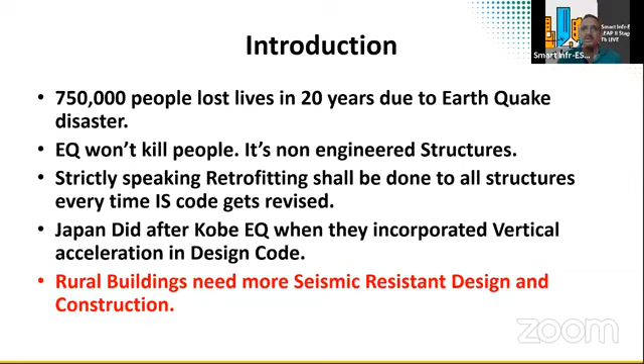So as engineers, we should know where we are standing.

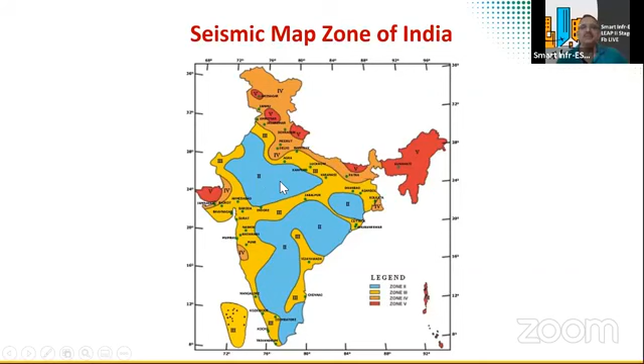So the direct effects of earthquake, we should know what they are: surface faulting, we see the faults happening, vibration of the soil, ground cracking, liquefaction, and ground lurching. Ground lurching means sudden jerk and sinking of the ground, and differential settlements in the buildings or ground. Lateral spreading of the soil happens like landslides, even in normal soil there will be lateral spreading, and landslides happen mainly in northeastern regions and Himalayan regions. We see most of the landslides happening there.

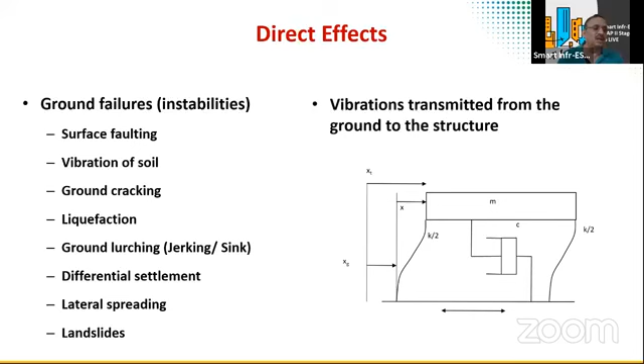So let us understand what the earthquake is all about. It is basically ground shaking and vertical acceleration and vibrations transmitted. Normally we have wind transmitting loads, and we always rely on earth for transmitting our loads. But if earth itself transmits the load to the structure, where do we transfer it? All dead load, live load, wind load, and other loads we transfer to the ground because we assume ground is stable. But if the ground itself shakes during seismic conditions, we have to do a special design. For structural engineers, this is a challenge and we have to learn clearly about it. So what is earthquake about?

For example, we have seen the Latur earthquake and Koyna Dam. Koyna Dam was constructed on a fault, and that caused the earthquake itself because of the excess loading. So for every special large structure, we have to do a geological study, whether it's a power plant, a huge water reservoir, a dam, or a high-rise tall building.

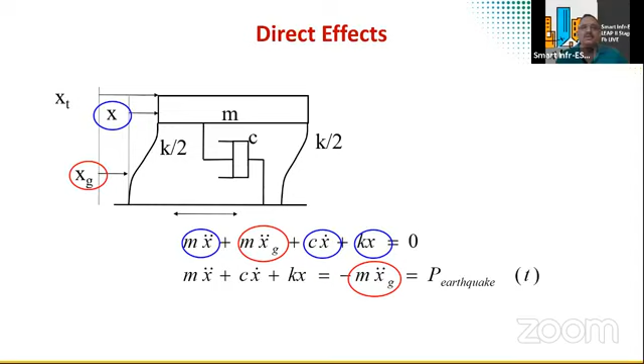So the force due to earthquake, M into acceleration, is the equilibrium equation of mass into acceleration of the structure, because the acceleration of the structure also depends on the stiffness of the structure and the structural system. And damping, as you can see, can also happen due to ductility. So this is the overall equation.

Next, indirect effects of earthquake: tsunami. This was realized in 2004, the first tsunami of the century, because tsunami is a result of earthquake. And seiche is a secondary, slightly lesser effect of earthquake, because it can happen in lakes. Suppose you are constructing buildings around a lake because it gives a beautiful ambience, but seiches can still cause an effect on the building even if not directly from the earthquake.

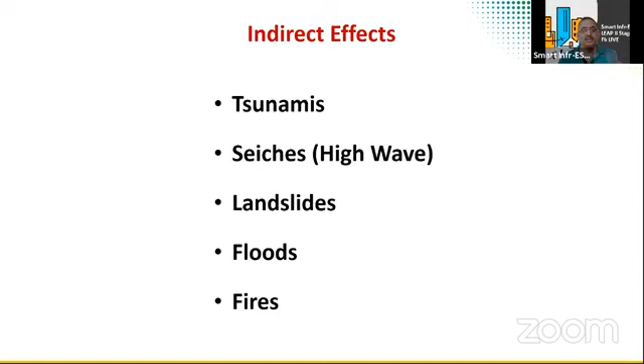So the water level can suddenly rise by 3 meters, 4 meters, either on seasides or river sides due to earthquake. So we have to consider seiche effects. And liquefaction - all of us know what is the effect of liquefaction, which I'll explain in detail as we move forward. Just showing an introduction to all these effects.

So seismic resistant design and construction is to prevent non-structural damage from minor shaking. What are non-structural elements? We have the partition walls, the flooring, the cupboards, the furniture, and the windows, the doors. All these come under non-structural elements.

So the objective of seismic resistant design is to minimize the damage of non-structural elements. We cannot totally eliminate the damage, but we can minimize it and prevent structural damage in occasional moderate shaking. And if it's a huge earthquake that goes beyond, predicting the actual earthquake effect on the structure is very difficult.

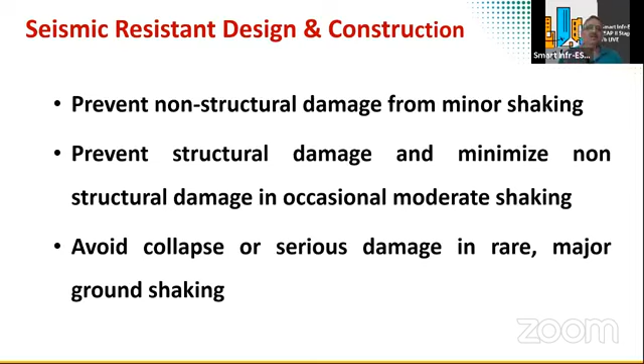Let us understand - we should also educate people that we cannot give 100% zero damage to the structure and non-structural elements. We should always qualify in our design brief that any earthquake resistant design cannot guarantee 100% performance, because the code provisions themselves will not give you that guarantee.

My experience of these earthquakes - my first experience was post-Gujarat earthquake. I had visited Ahmedabad on 30th of January as a volunteer structural engineer, because out of 60 structural engineers in Ahmedabad, 30 were arrested, and 30 engineers had gone underground out of fear of arrest. So there was no structural engineer left in Gujarat. So two of us had to travel from Hyderabad to Ahmedabad.

I had the first-hand experience of people's perceptions post-earthquake. I was also in the committee appointed and selected by the government at that time, along with - I had the fortune of working with Professor A.S. Arya, who is no more, he's in heaven now. He's the earthquake specialist, and I worked with him to draft the guidelines for damage assessment of earthquake affected buildings. We submitted this to the government, which is now code also, for how to compensate the damage due to earthquake in urban scenario, because this was the first urban earthquake experienced in India.

I was involved in a panel formed by Ahmedabad Municipal Corporation to draft guidelines for permissions, which I'll be sharing here, and designed reconstruction of housing in the state in Kutch region and Jamnagar area. I have done the design of these earthquake resistant structures, even ground floor structures. And I was involved in Latur earthquake reconstruction also.

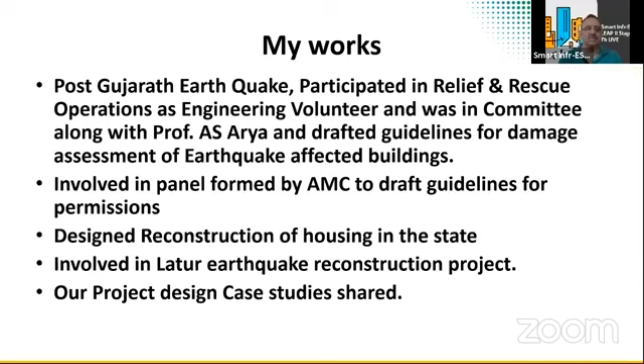There are a lot of photographs I have - the whole city of Ahmedabad has reduced to rubble. I visited Navsari, Vadodara, Surat also, in addition to Ahmedabad. And these are the photographs, because you should understand what are all the weak things in the building.

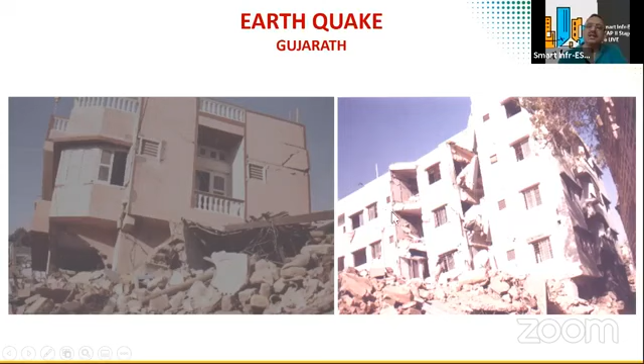Staircase is also a weaker thing. Many times, some staircases stand depending on the direction of their orientation. Here you can see the staircase has failed and saved this building - otherwise two blocks are connected with the staircase. Normally it happens at the lobby and staircase - a weaker element has failed, and a stronger element has retained. So this is the photograph, and here you can see...

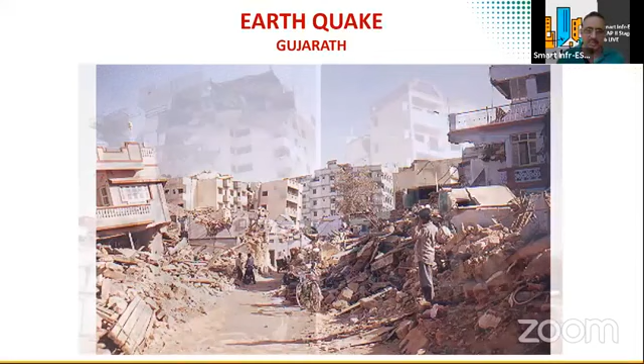So we explained - I was on TV channels, though I didn't know Gujarati or even Hindi well, I was trying to explain, along with the SPs, the collector, and the principal secretary of Gujarat state on a channel, to the people what an earthquake is and how it repeats and all that. So it was a great experience, and these are the buildings which we studied.

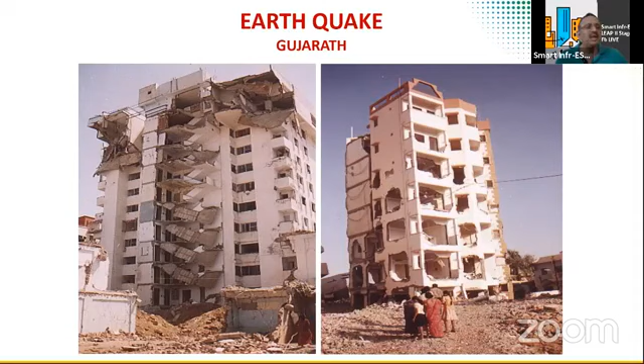People used to come to us to recommend demolition, some people used to come to us to recommend retaining the structure with restoration. These are all the things you get. We feel it all happened just because of no engineering, ill-engineered structures or no engineering at all. This is the biggest thing. And with Gujarat falling in such a risk zone, many buildings were not designed for earthquakes at all. Then I thought I must take it up.

And this is a building for which I had to give the demolition sequence, because on the side of this building there was a heritage building, and it was tilting towards the heritage building. This used to be the news - the beginning, the collapse of this.

I was witness to the collapse because I had given the imploding collapse sequence, because I always say that a structural engineer should know the failure first. If you can predict the failure mode, then you can design correctly. This is also explained in Purushothaman's book.

So you should know, you should draw the failure, how it happens for your structural system, then you will detail correctly. If you detail correctly, at least you can prevent the collapse. Whatever worse can happen, as a structural engineer we should prevent the collapse. So these are the other structural element failures, you can see.

I have seen some columns with just 6 12mm bars still holding up 5 floors. I mean, I can't even design a ground plus 1 building with 6 12mm bars. It's not adequate, but this is what happened, with a soft story added to that. You can see even the ties are so few. So the concrete has failed here.

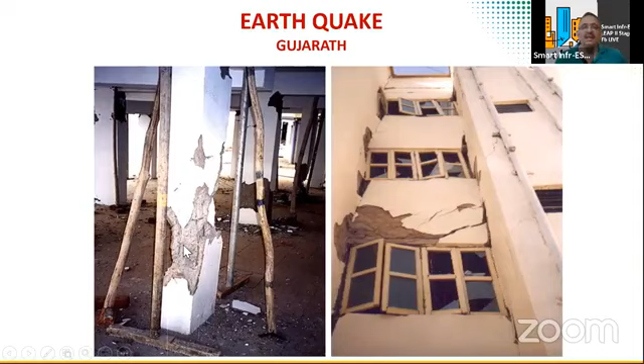So this is another top. That's why you always see this happening in the top zone and bottom zone. Here you see the spacing of the ties, and there is no tie immediately below the beam also, so there is no confinement. That's why the concrete gets crushed. Maximum shear zone is here - shear transfer has to happen here, and maximum compression happens here. If you don't have confinement of the ties here, this concrete will fail.

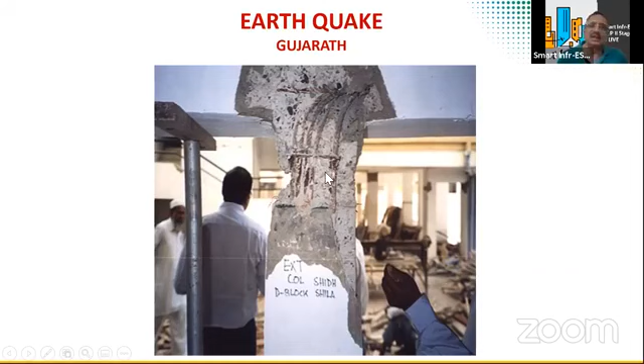And this is another building which has collapsed. Everywhere rubble. By the time we went, they started reconstruction. But again, this is not correct. We call this cosmetic treatment. Some people were just filling the cracks with mortar, and some were doing this thinking it is jacketing. This jacketing also is not correct.

So the restoration and rescue operations were like this. I talked about the Gujarat earthquake because that is the nearest one that happened in India, 20 years back. Now these are world examples of earthquakes.

This is the Niigata, Japan earthquake. You can see the buildings collapsing like this because of the liquefaction that happened. So whenever we are designing structures on sloped areas, I'll explain about liquefaction and how to take care of that.

These show the importance of adequate lateral bracing. You can see they have put the portico nicely, it looks very nice, but structurally it's not stable. We should understand that whenever there is a diaphragm action, there should be adequate lateral bracing, because moment transfer and shear transfer cannot happen just with the slab, diaphragm and column directly.

This is another structure slide showing damage to a 1.1 meter diameter column. We think it is very strong, but see what happened due to the earthquake. You have a nice false ceiling, lighting and all, but what is the use? The structure is lost.

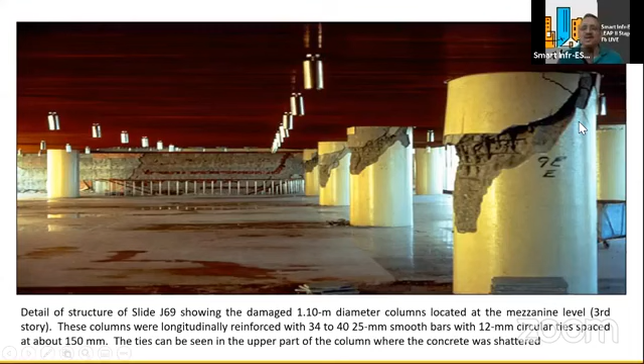This is another hospital in California, a 5-story medical treatment and care unit. Hospitals are most important, because when an earthquake or any pandemic happens, hospitals are the essential infrastructure for people to go and get treated. People get injured, and to prevent loss of life and enable rescue and relief operations, you need hospitals first, and water supply first.

That's why important buildings should have more importance factor. You should ensure these buildings survive even after the earthquake. That's very important, but still they have failed here.

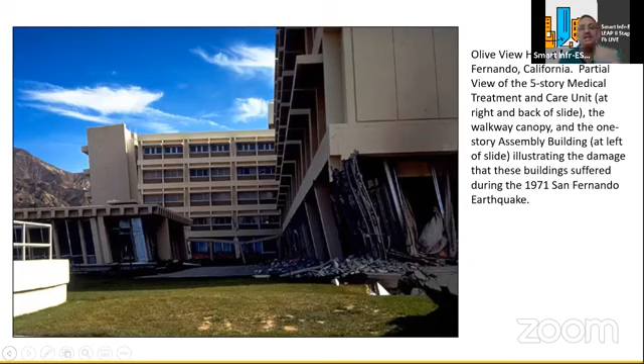This is the behavior of the 1st and 2nd story columns in this building slide. You can see how such a large column, even with confinement reinforcement, has failed like this, and this one floor has come down.

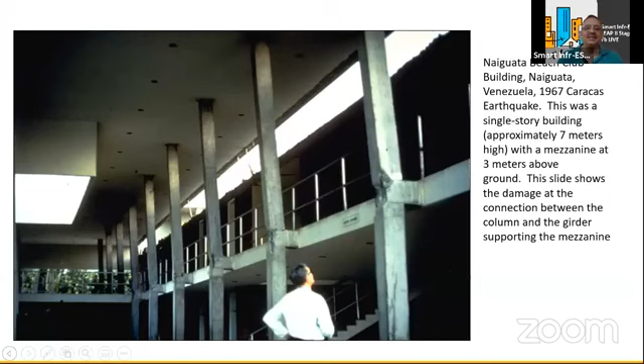This is another earthquake collapse of the 1st floor. You see the column, and just by looking you can feel they're not properly tied. The result is seen here with the earthquake. This is the Four Season apartment building, Anchorage, Alaska, 1964.

So these are all the failures that happened. You should see how the spalling and crushing of concrete happens near the support and base always, first it will happen here. I'm showing so many pictures because worldwide it is realized that confinement reinforcement and ductile detailing has to be done near the support and near the column-beam junction.

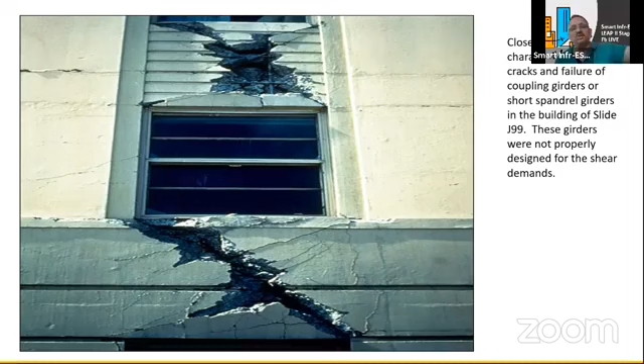And this is the X shape. This is in Ahmedabad - I'm sorry to say, we used to call it the Desai phenomenon. There are so many structures designed by structural engineer Desai which had, because of stress reversal, this X phenomenon between windows. If you have two windows, between them you will find this X cracking. We observed this even in Gujarat, in Ahmedabad also.

And this is the shear wall collapse also. I'm just showing a building that is there, normally designed nowadays with shear wall, transfer slab and transfer columns and all that. It is very dangerous, you can see what happened here.

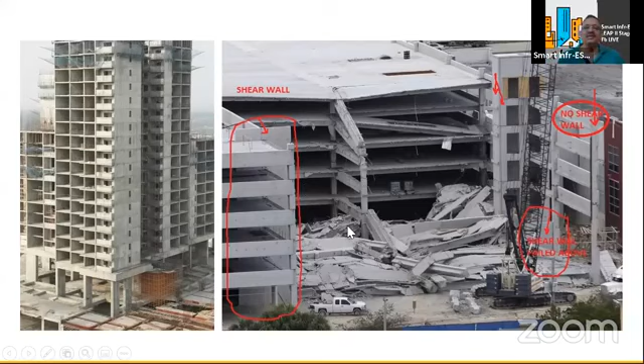Now coming to earthquake resistant design. We should always understand the failures first, as I said, in structural engineering, then only we can design properly. Buildings need proper planning, design, construction, and public safety and comfort. Because when an earthquake disaster happens, we have to ensure disaster response, disaster relief, and disaster rescue is possible. We cannot kill people by not having this public safety and comfort.

This is the ground acceleration in both directions and how the building responds to it. So plan the building and structures symmetrically, both in plan, horizontal axis, and elevation. That means we have to maintain uniformity of stiffness, and avoid open ground or soft story used for car parking.

In fact, these are the guidelines we drafted in 2001, even before these codes came in 2002. And avoid weak story, and provide strong diaphragm.

Avoid weak story like wall and diaphragm, not column and diaphragm. Diaphragm is actually the slab, so thinner slabs and flat slabs are to be avoided. Avoided, we don't say banned.

Provide openings for doors and windows at a distance of minimum 0.6 meters from the column edges. Follow IS 4326 page 11 for more details of masonry structures.

This is the 2001 recommendation. So follow the IS code and NBC provisions while planning, in the planning stage itself, and this will aid more safe structures.

And select good materials like concrete ingredients, brick, steel, especially steel having an elongation of above 14% and yield strength of minimum 415, but now we have 550 also. The yield stress shall not be greater than 415.

Steel having a yield strength of 500 may be used provided the percentage of elongation is above 14%. This we drafted in 2001. So make sure before approving it by means of lab test results.

So people say that I got the test report from the manufacturer. No, never accept a test report from the manufacturer. We have to collect the sample at the site and get it tested.

Provide plinth beam at the ground level and a lintel and roof band in masonry structures, and do not lower the beams in RCC frames at lintel level. We see this in rural areas for convenience of construction.

What they do is construction like mullion and band type. That means they'll put the beam on top of the window or door level, and they don't put the beam at the floor level. So we lose the advantage of the diaphragm action if you don't have the beam right below the slab.

This is a very important point we observed in post-earthquake studies. We observed many buildings failing because there is no beam for transfer, because the diaphragm slab cannot transfer the shear to the columns directly. So you need a beam definitely at the slab level.

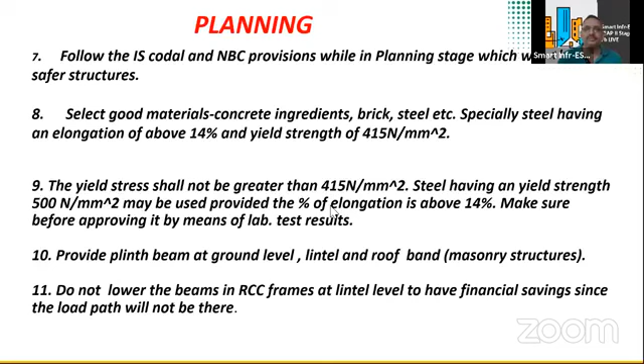So earthquake resistant design, what is it all about? We have to choose the right structural system, very important, and then analysis and design methods.

And we should consider the foundation and soil structure interaction, and then structural detailing. Detailing of structure is very important, ductile detailing. And the structural system should be symmetric.

It should have uniform mass and stiffness. You should calculate the mass distributed in all the corners, all the center and all. And rigid frame and external frames, infill frames, and expansion and construction joints.

Infill frame we can design, but we have to do tying of the bands and mullion in the infill frame so that the wall won't collapse out of the plane and you lose the infill frame effect.

I'll show you that. And if you don't want infill effect, you can also design, but you have to isolate the masonry with the beam and column by separation joint and treat it for aesthetic purposes separately, but you have to maintain no contact so that you will not get that stiffness of the infill.

I'll show you the explanation of this infill systems which you observed, and expansion and construction joints and isolation systems and materials to be used for earthquake design.

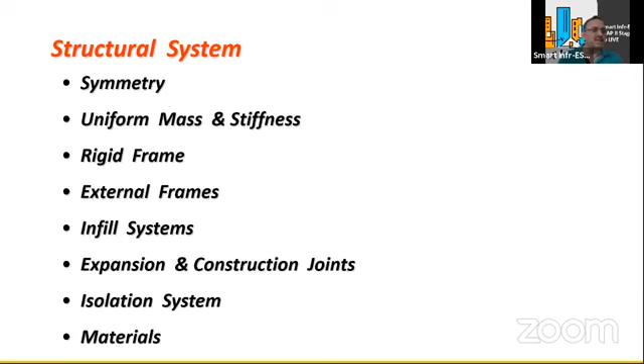Center of mass is like for a rectangular shaped building with all symmetrical walls and all that. You can calculate the center of mass by simple moment of inertia principles, mass into CG distance. I cannot go to that level now, but please calculate the center of mass based on moment of inertia.

And center of rigidity is actually stiffness. You have the stiffness, shear stiffness, flexure stiffness, and you calculate the shear and flexural stiffness and see that you have the uniformly distributed stiffness on both directions at all levels. This is about center of rigidity.

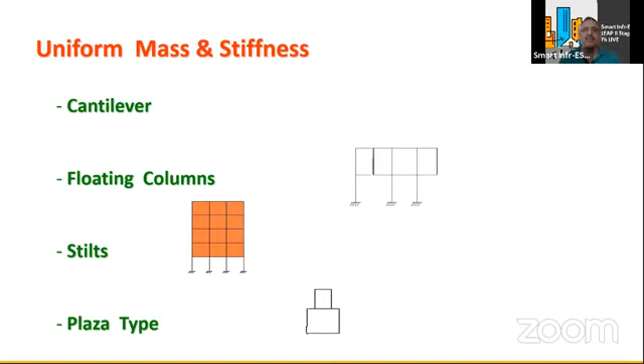We have to design these plaza type buildings, but we have to analyze considering the 3-dimensional effects. So 3-dimensional analysis is compulsory, it's not an option. We have to do it, and in modeling we have to consider infill effect depending on how it is constructed, and foundation design, with foundation modeled with the stiffness of the soil.

For pile foundations, we model separately. For raft foundation, we model separately. And isolated foundation, we model separately. And loads representation - uniformly distributed loads, concentrated loads. And mainly you have water tanks, overhead water tanks, swimming pool on the terrace, very nice, but design-wise you have to take care of that.

And seismic coefficient method - yes, you can do seismic coefficient method if you are not able to do it for uniformly distributed mass and uniformly distributed stiffness. There is a qualification in the seismic coefficient method. If your frames are regular frames and your stiffness is uniform, if your mass is uniform, you can conveniently use seismic coefficient method for preliminary design.

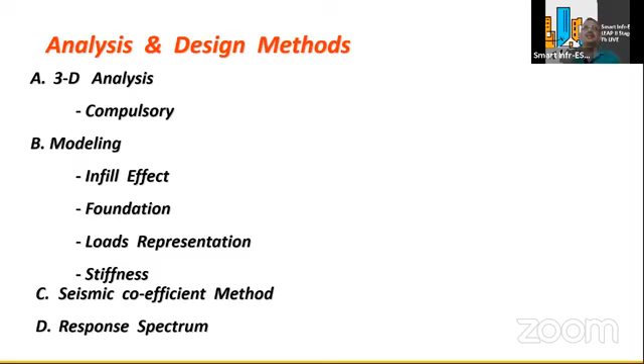For final design, because there will be so many stress concentrations and all, you have to do the 3-dimensional analysis and response spectrum analysis or modal analysis. You have to do this, and estimate the correct natural frequency of the structure, and calculate the forced vibration analysis also.

So if a building is enough to resist the earthquake, then such building is called earthquake resistant design. Such design is called earthquake resistant design. And design is analysis of forces on buildings due to loads acting on it.

Sorry, this is a very 2001 presentation. I am still using it, I don't want to edit this. I will know what I was 20 years back by reading this.

So design - only multi-story buildings require scrutiny in the present bylaws. But our recommendation to Ahmedabad Municipal Corporation was that investigation should be mandatory - geotechnical investigation, and empanel geotechnical engineers, and proof checking by senior structural consultants also should be made mandatory.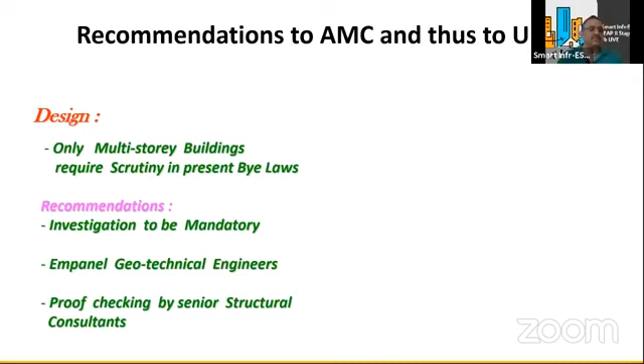There is no rule saying you should do response spectrum analysis only for this many floors. No, you have to do it for all buildings. Let us not give any concessions. For any building, any structure - I have shown you a G+1 building collapsing. So we have to do the three-dimensional analysis for every structure, consider the masses as per the design intent of the owner, and design for that structure.

And in construction - presently, at that time in 2001, only municipal engineers checked the construction. But there should be full-time construction engineers made mandatory. This is our recommendation to Ahmedabad Municipal Corporation. And quality checks as per standards.

You can see all my lectures, because I do all this only because of my experience post-Gujarat earthquake. I have become more responsible actually after seeing that calamity and disaster. Materials and workmanship have to be made mandatory checking by the engineer on site.

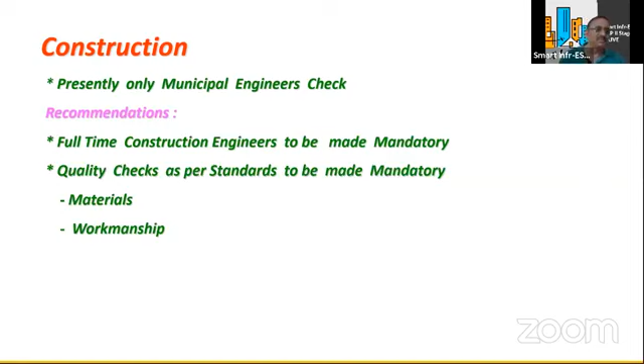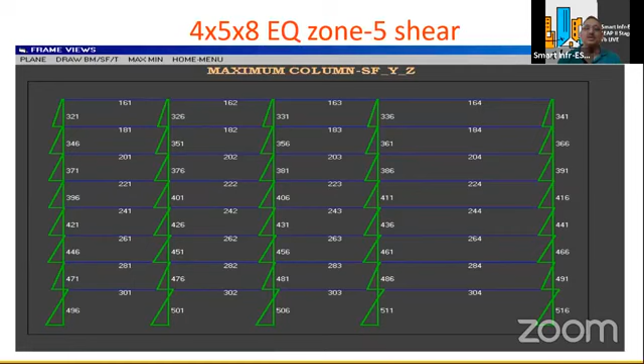In 2001 I did this, and this is the maximum with zone 5 shear. So you can compare these three, how it is varying with zone 5, zone 3, and no earthquake. And this is the without-earthquake bending moment diagram, how it looks when no earthquake is considered.

That is dead load, live load combination, and this is zone 3 bending. You can see how this is a stilt, and how much variation there is in the bending. And this is zone 5 bending.

So I have done all this again by considering the infill shear. If you consider the infill effect, this is the change in shear force. And this is zone 5 with infill shear. So this is the variation.

And this is the bending with infill, without earthquake consideration. But for the infill, we have used the strut model. And this is the zone 3 with infill bending, earthquake zone 3 infill bending. And this is the zone 5 infill bending.

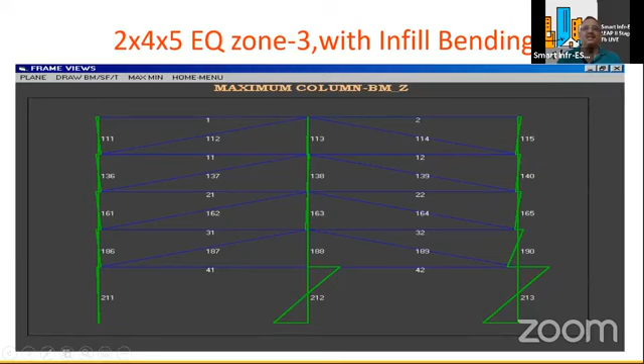I remember I have gone to Solapur, Sangli, Vijayawada, Vizag to give lectures, and of course in Hyderabad, post-Gujarat earthquake, to bring awareness among engineers. We have gone and explained all these things.

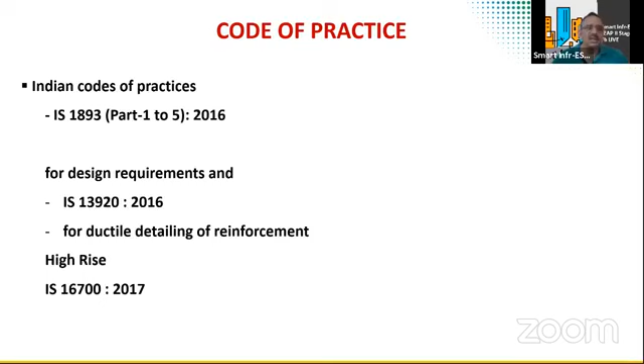So what are the Indian codes of practice? IS 1893 part 1 to 5 for various buildings, 2016 is the latest code, for design requirements. And IS 13920 2016 is for ductile detailing of reinforcement. For high-rise buildings and structural systems, you should use IS 16700 2017. These are the latest codes that we have to consider for earthquake resistant design.

And this is the top view of that structural frame. You can see we have tied all the frame. This is what I call a buttressed core, because we have given stiff beams connecting the shear wall and the central core to get the benefit of the central core stiffness. And we have saved a lot.

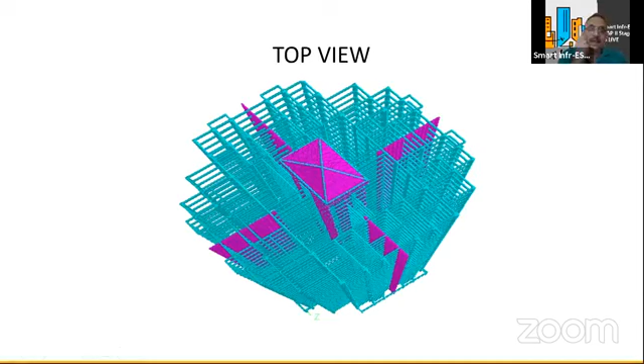As I said, if you have a uniform, simple structure, you can go for quasi-static preliminary, but a final drawing you release only after dynamic analysis. And this is the terrace floor plan.

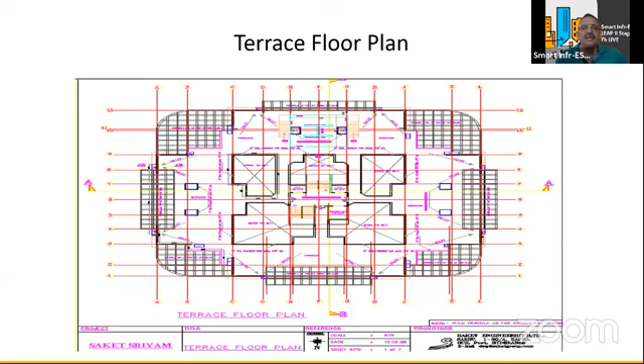And this is the detailing of the shear wall. Mainly, you can see the reinforcement at the corners, edges. You have to detail as per the wall reinforcement requirements and also the ductility provisions. You can see this is the 3D view of that shear wall. This is the lift core, you can see.

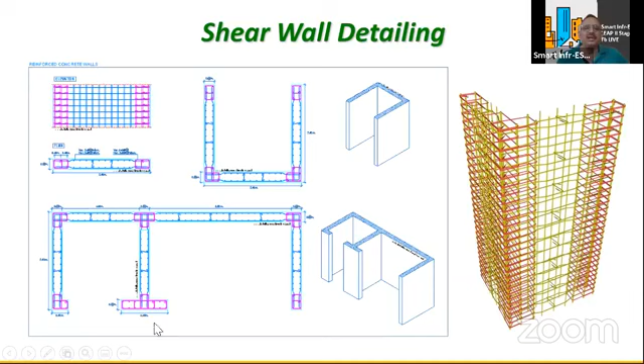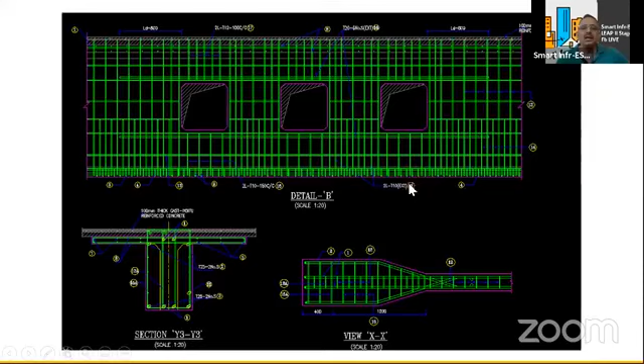And this is the metro beams which we have designed, precast beams. The detailing, this is zone 4, actually in Gurgaon we have designed, and we have taken the huge diaphragm action. Here you can see, though these are all precast I-girders, we have connected them through reinforcement and diaphragm within in-situ concrete. So diaphragm action is very essential in any seismic resistance, because that gives rigidity within the floor so that it will distribute the shear uniformly to all the supports.

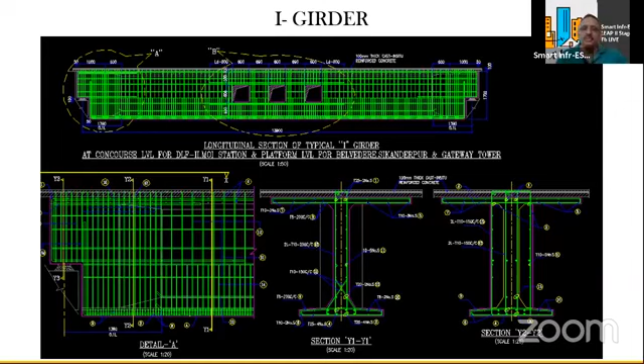And so this is the detailing at the stepped beam. You can see the transition zone for the stepped beam. All this detailing is done. This is the cross section of the station, because station buildings are more critical in earthquake resistant design. These are all I-girders precast, and there is a diaphragm, and this is the railway platform side, and this is the concourse side.

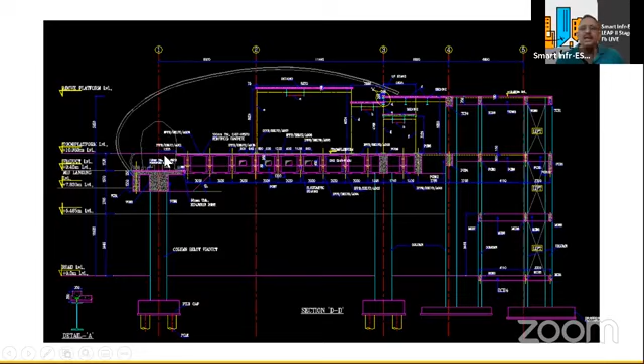Next, retaining walls. This is also very important. People think that retaining walls or compound walls need not be designed for earthquake, but they are also important. This is what I'm trying to say.

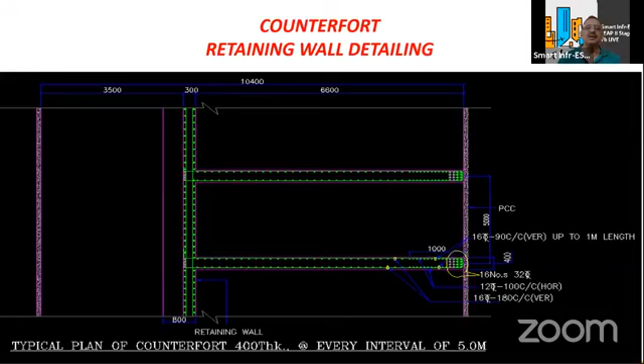So this is the plan of that retaining wall. It is huge, same retaining wall, we extended it for 22 meters height also. In one of the runway locations we had to design for liquefaction because of the soil.

You can include shear walls in the stilt if you want to match the stiffness of the infill effect.

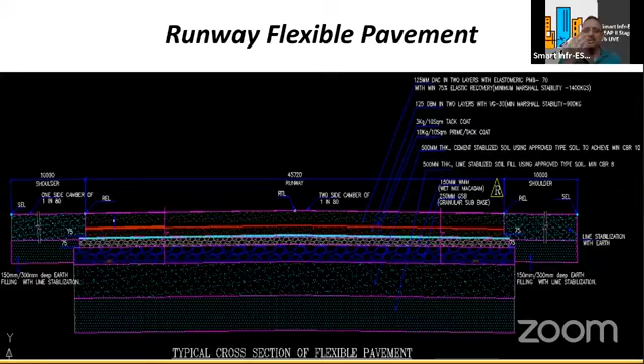This is the runway base where we have used membranes to prevent liquefaction on the runway, because it's a 2-kilometer runway. So we have provided a separation polythene sheet and then used synthetic fiber. The structural analysis has to be carried out.

I think we are running short of time. Sorry for the interruptions. And a decrease of percentage - so how to increase the ductility?

How to increase the ductility, as it is defined as the ability of a structure to undergo inelastic deformations beyond the initial yield deformation, with no decrease in the load resistance. This is the main purpose of ductility. So how do we improve the ductility?

Decrease the percentage of tension steel - meaning don't go for 4% steel in columns. Try to keep 1%, 1.5% steel in the column, and increase the percentage of compression steel.

Because for compression, you should not depend on concrete alone in beams, for example, so you use compression steel. Then decrease the tensile strength of steel - that means even if you are using 550 grade steel, better restrict your tension capacity, give FY as 415 only and design, so that you have additional ductility in the structure.

Increase in the compressive strength of concrete - minimum M20 those days, now it is M25 minimum, and M30 and above you do. Increase in the compression flange area in flanged beams, T-beams and L-beams, you increase the compression flange area.

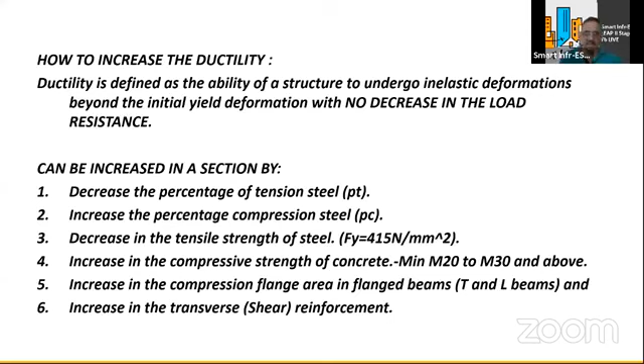Compression failure is not ductile, actually it is a brittle failure. So, increase the transverse reinforcement - ties and stirrups - you have to increase, so that will improve the ductility.

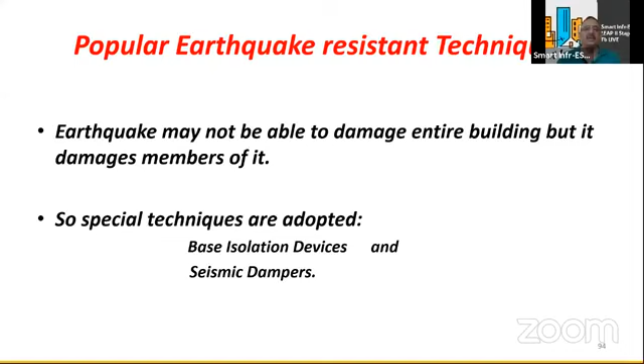Popular earthquake resistant techniques - earthquake may not be able to damage the entire building, but it damages members of it. So special techniques are base isolation devices and seismic dampers. We have active control devices, tendon control devices, control force devices and active...

Tuned mass dampers actually. So this is the base isolation device you can use. We have done this kind of structures with base isolation also. Sensors measure the external excitation and the structural response.

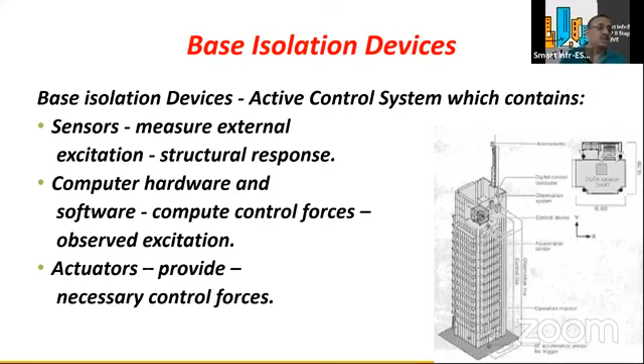Then we have the active control system - computer hardware and software compute control forces for observed excitation, and then active dampers activate. Actuators provide the necessary control, so you have to use control engineers for designing this. These are also called intelligent buildings, which respond depending on the force.

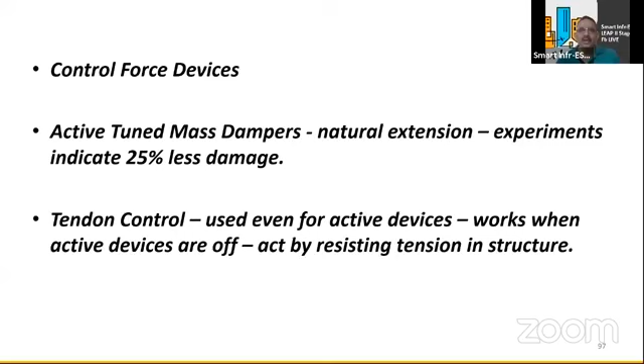Control force devices, active tuned mass dampers - natural extension experiments indicate 25% less damage by using these tuned mass dampers and tendon control. In fact, in Japan kind of situations, one type of damper is not adequate, so they introduce 5 types of damping, which I'll show you.

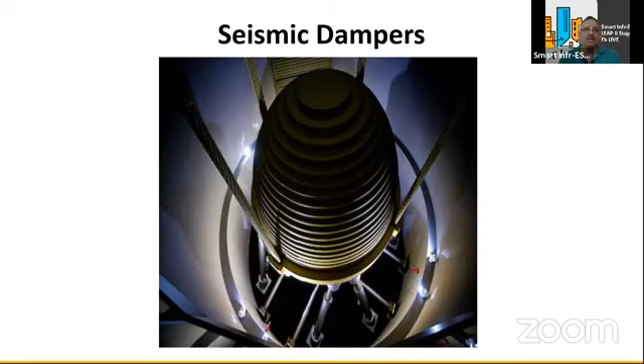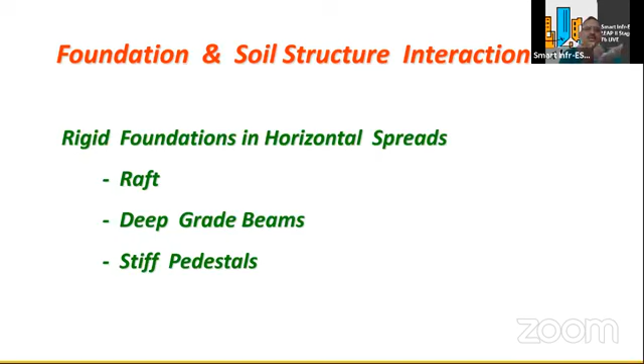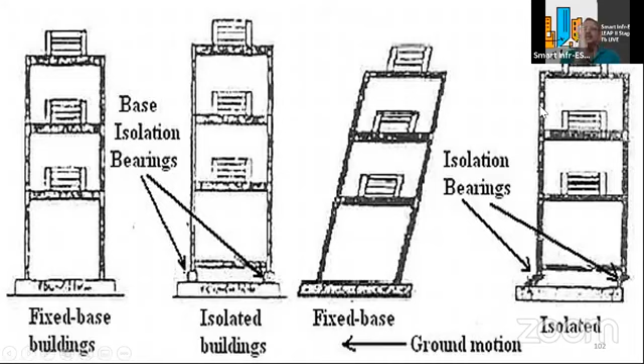And this is the raft. We have designed a floating raft in a high earthquake resistant zone. This is a project we did, and liquefaction is there in this project. We had liquefaction effect, that's why we designed a floating raft by removing the loose soil and replacing it with concrete. Though there was no basement requirement, we went 3 meters deep to compensate for the liquefaction effect.

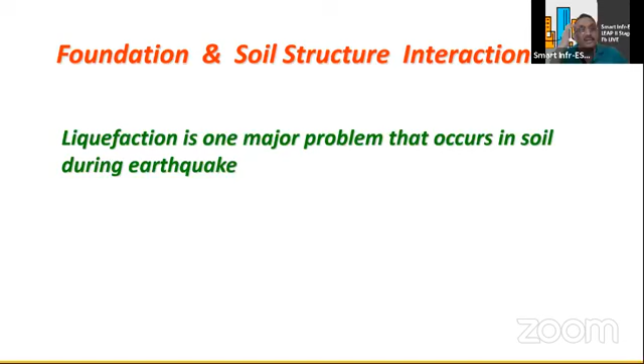You can see, take the sandy soil, put it in a bucket, just put the vibrator, pin vibrator, to the bucket. You see what happens - it will get compacted, consolidated, is it not? In the earthquake, the same thing happens. The wave, the movement of the waves, suddenly consolidates the sand. So that is called liquefaction.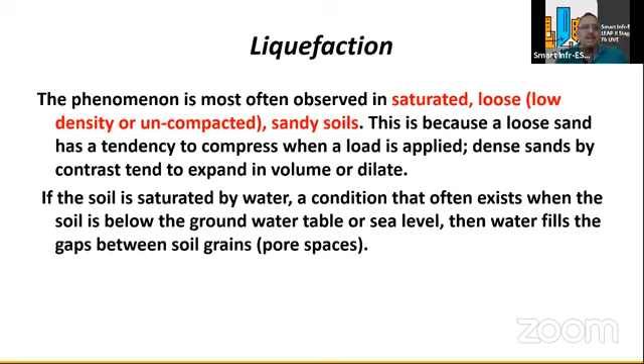If the soil is saturated, this is all the explanation of liquefaction, how it happens, but I explained it very simply. So any wave, in fact practically we experience that - you put on a plate this loose material, like what we use for cooking, and try to do the wave, and you can see the liquefaction effect on that.

Water pressures may build, so this is liquefaction, loss of soil structure. Soil has a structure, is it not? There is a stress transfer happening when you have the building. Suddenly there is a wave, this soil suddenly settles, then the building falls. There will be a consolidation happening below the foundation.

Liquefaction, a good example is the seashore. You stand on the bay shore and see what happens when the water comes and goes below your foot - you will go down, is it not? That is liquefaction actually. When there is no water, you stand firm, and when there is a water wave coming and going, the sand liquefies - easy to understand. So you can see under your heel, you will go deeper in the seashore.

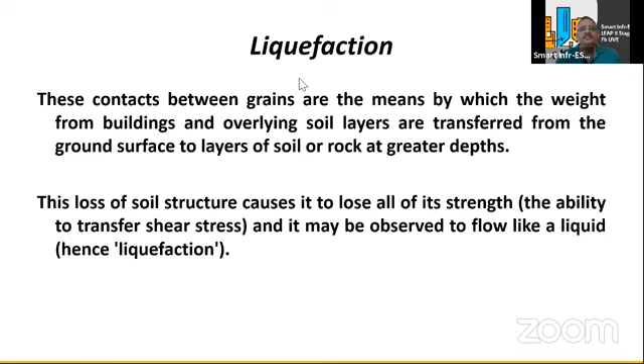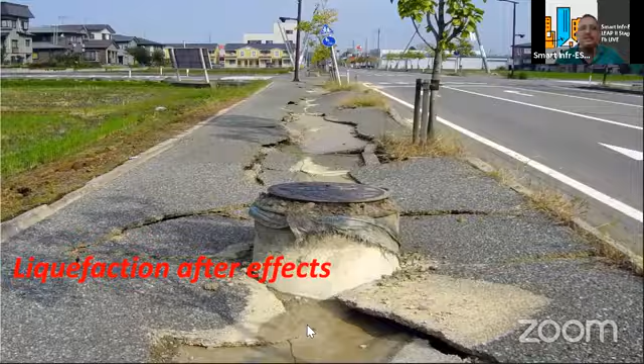So this is the effect of liquefaction, which I have shown before also. And this is liquefaction after-effects, the soil, how it compacts, and mainly the services and all will be affected because of this liquefaction. So now I thought of sharing these codes, showing the codes and explaining how to read, but time doesn't permit.

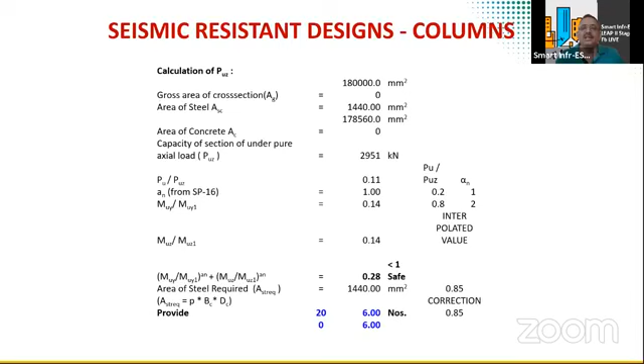So this is the seismic resistant design of the columns. This is from SP16. And finally the detailing requirements are all taken care of here, and the moment and shear, how it is detailed - I'll quickly go to the detailing aspects. This is the column beam junction and special confinement reinforcement. Hyderabad is in zone 2.

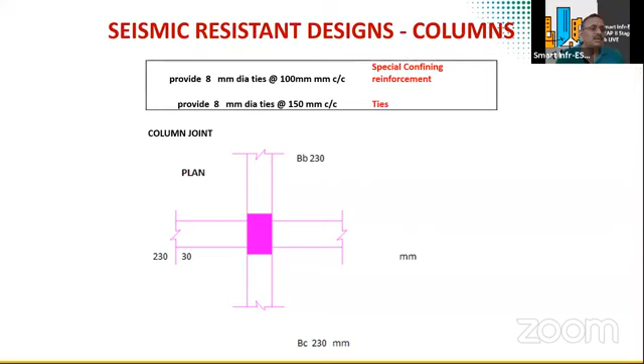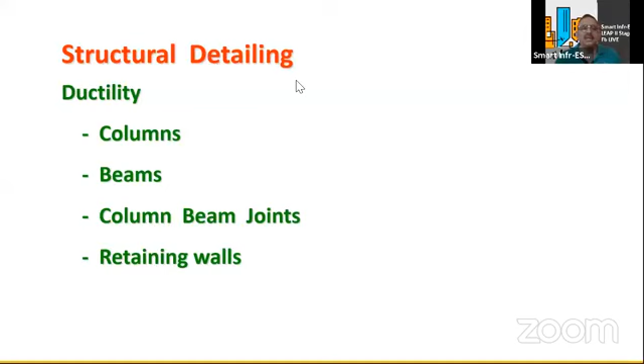So, seismic resistant designs for columns - we have to consider all the forces and ductile detailing. Column beam junctions and retaining walls - these are all the various elements where detailing is important.

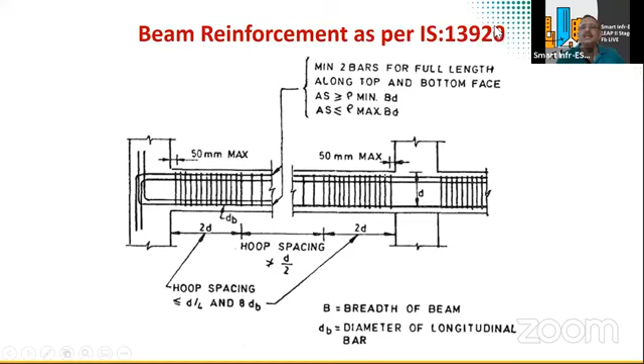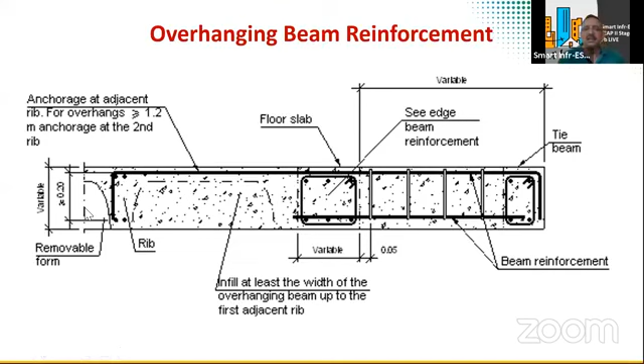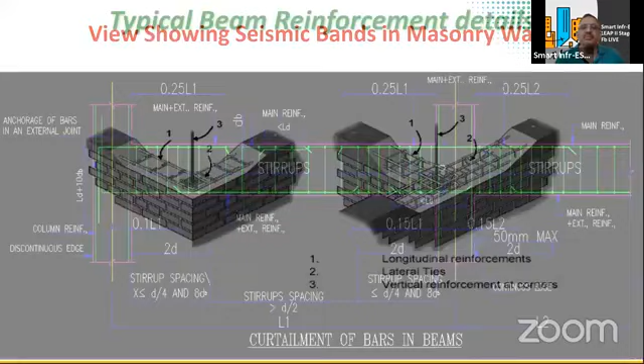You can see the confinement reinforcement stirrups that are happening. This is the typical column reinforcement details and beam junction. So you have to provide the ties for the column in the junction also. It is difficult, but somehow we have to plan providing the ties at the beam column junction.

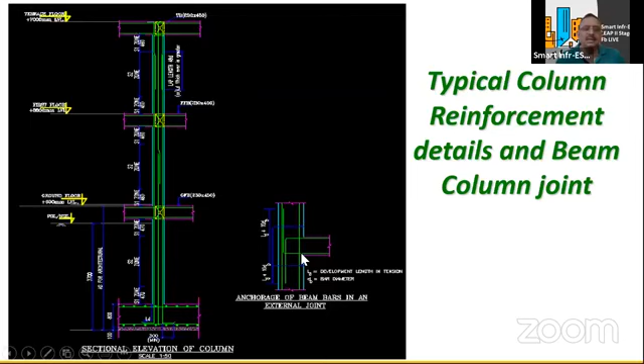Good planning and design will not alone aid in resisting seismic forces, because even if we do the best design, if the concrete is bad, it's no use. Select good materials, follow the mix design as obtained by the lab, provide the covers as per codal provisions, and do not use bad aggregates, marble pieces, etc.

And we have seen that recycled steel materials are used, and follow the design details as furnished by the structural engineer, and compact the concrete by means of vibration, and cure the concrete for at least a minimum period of 14 days. An experienced supervisor should be employed to ensure good quality.

And the conclusion is, built environment has to be engineered to minimize disaster damage, and seismic resistant design is not an option or choice, it is a must actually. Engineers should educate people and engineers to implement seismic resistant planning, design and construction, and seismic qualification of buildings.

This is very important. You have to advise your clients to do seismic qualification of the building once every 5 years. And you should write to all your clients to do the retrofitting of the buildings for the revised codal provisions.

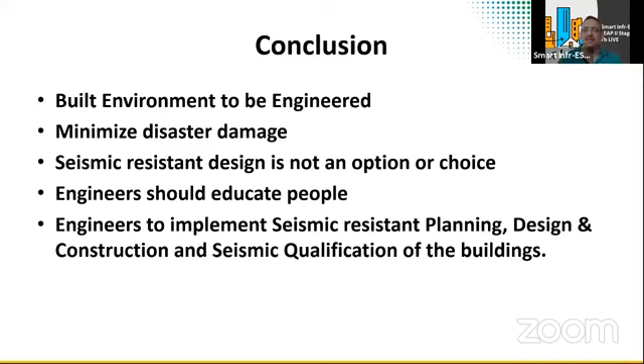So this is all for today. If you have any specific questions, I have been covering them. Zone classification based on soil - no, zone classification is based on the earthquake risk and earthquake intensity, actually.

I have explained the Himalayan region has got the highest zone because of the tectonic plate movements and all. India is moving towards the Himalayan region, that's why Himalayas are higher. So Himalayas have material of the ocean bed, that means the ocean bed has moved to the Himalayas.

Minimum size of columns in industrial and residential is 300 mm. 300 mm size is preferred for zone 3 and 4 as the minimum dimension.

What is the behavior of buildings along hill slopes? Yeah, that you have to do very carefully. On hill slopes, you have to stabilize the slopes and do reinforced earth so that it won't collapse. You have to bother about upstream and downstream also.

Load combinations as per IS 456, we have to consider dead load, live load, earthquake, dead load plus earthquake alone. And which type of isolated footing foundation is advisable, trapezoidal or box only?

Reinforcement in top face is to be provided, that is always better. We should enforce a system to deploy experienced supervision engineers to implement the designs. Yeah, correct, Chittibabu. Improve the workmanship.